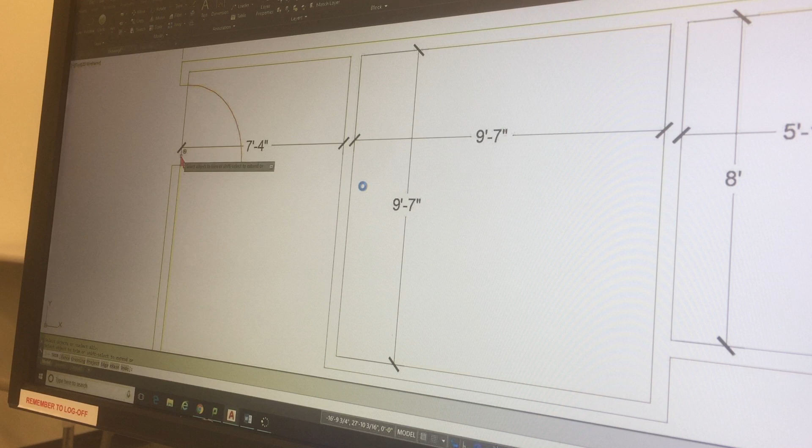Okay, so that's what we got, and then I would trim this out here again, using select all, just to make it look a little better. Now this one doesn't have to be trimmed, because that is a dimension, and so I wouldn't want to get rid of that. And this one looks like right here. Yeah, so sometimes you got to kind of choose things a little bit differently to get it to trim. And there we have that.

So then I can just go ahead and start to move my dimensions where they need to go. In this case, this is supposed to be outside anyway. So this is how you begin to build it.

Now, my next wall, and another cool thing too is if I want to use my software to change my layers, I can just go to here and say make current. I click on make current right there, and I click there, and it makes my walls the current layer. So it's that brown layer.

So now I'm going to keep on, and I'm going to go ahead and touch it here, and my other wall's got to be 4 feet, so I type in 4 feet, like that, boom. And then it's got to come out a distance of 4 feet 4.

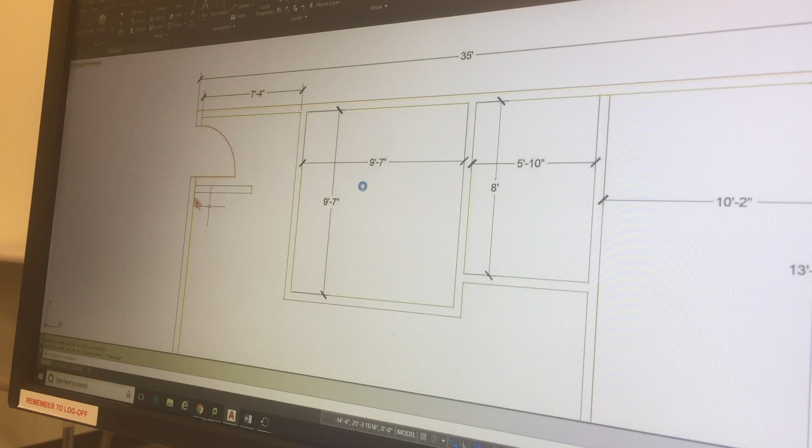And then the thickness of each wall is what? Yeah, and so I can just go ahead and bring it back here, return it, and we'll snap right to there. Go ahead and trim it again. And that's gonna, and so you kind of get the idea.

Now, once I want to put in my windows, there's a couple different things I can do. Okay, we'll start with this 4-foot window that we see at the lower left here. Now, first of all, we're going to change the layer to windows. Now, to draw this right here, there's a couple things I can do. I'm just going to show you a couple different ways to do this. There's more than this way to do it, but I'll show you this.

You'll see that my measurement tells me what the center point of that window is. What's the center point of the window? Okay, take a look at the upper left part of our drawing. Let me show you what I mean.

We're going back here to floor plan assignment. Make sure this is clear. Okay, here it is right here. And this is the right measurement. Yeah, it is. Okay. Yeah, by the way, if we were missing a dimension, we can find it right here.

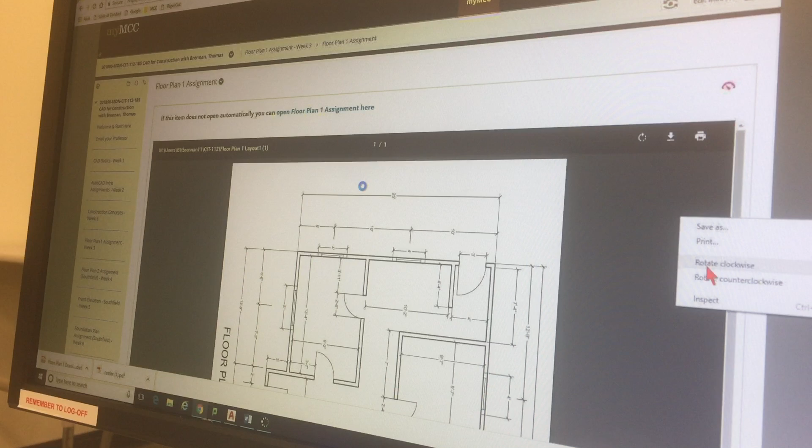Okay, so what we have right here is the distance from here to here is what? 10 foot. It's 10 feet. So that's telling me from the outside wall to the center of this window is 10 feet. And very often that's how windows are dimensioned. So it's a 10-foot dimension.

So I got my windows going here. I can start, just to make life a little easier on myself, I'm going to start with a polyline. I'm going to start from my outside, and without clicking, I drag it down. I type in 10. I kind of lost it. All right, and I go down here 10 feet.

Okay, and then when I've got that, that's my center, the center of my window, so that's where I start. Now, how wide is my window? 4 feet. So I can go up 2 feet, and then go in this direction, then down for the full length of the window, which is 4 feet, or 48 inches. Then I go back this way, and close that out.

Okay, so I went ahead and drew that, and you can see that's in place now. Now, just so you understand how I did this, I made the trim pieces on each side 6 inches for each window, so just go over 6, and then we can go down to there. Then we do the same thing, just touching it here and going 6 inches and drawing those little line pieces.

And then I want to make sure my midpoint object snap is turned on, and then I can create my final line, which goes right here, like that. And that is how you create your windows.

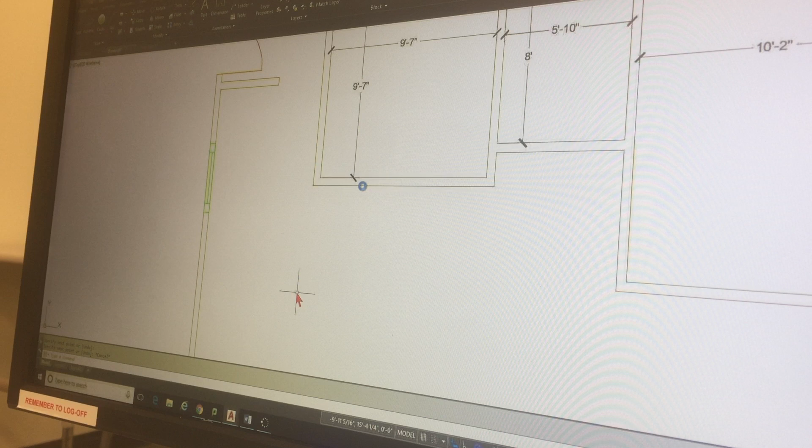Now we're going to get into inserting blocks and so forth, but for right now, that's just a quick and easy way to make a window.

Now, if I go back to my dimensions here, I'm on the dimension layer, and I want to go ahead and identify that and say, yep, it's at 10 feet. It picks up the midpoint right there, and it finds that, and we're good to go. So now my drawing is looking pretty kosher.

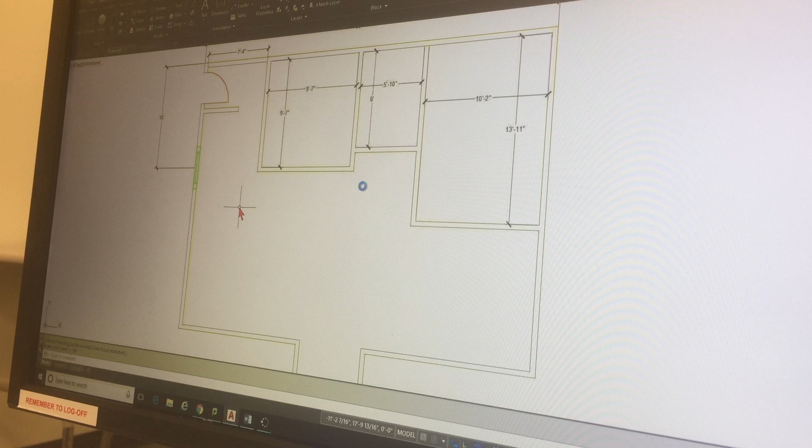Now, at this point, I could just go ahead and copy that window exactly 10 feet down. So now we're going to look at the copy command.

So the copy command, I can just go ahead and pick these elements, and since I'm using my blue selection tool, it only selects these things. If I were to go in this direction, it picks up way too much stuff. So I go this way. Does that make sense? Yeah.

All right, so I go there, and I right click. Now at this point, I'm going to click here, and drag it down. How far do I want to go? 10 feet, that's right. And then I got that, and we're going to verify that it is right. So go from midpoint here to midpoint here, and if I got it right, we are in business. So I just did a quick copy right there.

Once I got one, I can just copy it all around, okay. So that was copying, and that's how I got my two 4-foot windows.

Now, if everything's right, my last dimension down here should be 5 feet. Let me take a look at my drawing out here. This should be 5 feet, if I did it right. Let's find out. So we'll go ahead and click here, and click to the center of this, and shazam, we're good to go.

What did you click on though to make it move? How did it know it went from the center and not from the top? Okay, what I did here is run a dimension here, clicking it here, on the window. When you moved it, okay, good question.

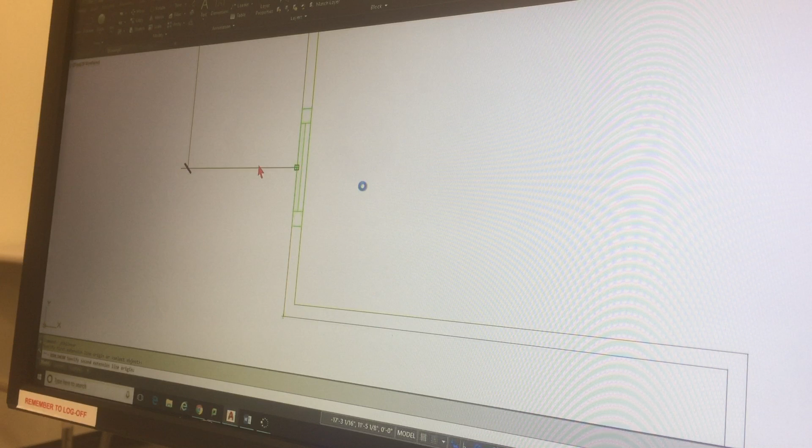Okay, so what I'm going to do here is if I just go ahead and erase this, just grabbing that. Copy goes like this. Copy is a great command, copy and move, you're going to be using this a lot. So go to copy. Now, first of all, we saw this is not a good idea.

So they decided to test the emotional intelligence of this particular gorilla. What they did is they started to treat this gorilla really, really well. They gave it new food, petted it, made sure it had toys, took it for walks, all this kind of stuff. And it would begin to express things like 'I love you.'

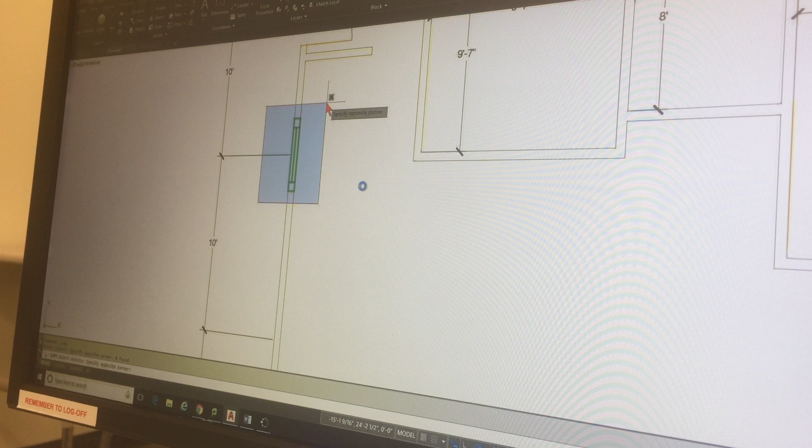Then they decided to see what he'd do if they treated him not so good. They started to deny him his food, left stuff out of his reach, and just started to mess with him to see what he'd do. And he cursed them in the most profound gorilla language, which was 'you dirty bad toilet.' So that's gorilla cursing right there. That's real gorilla cursing.

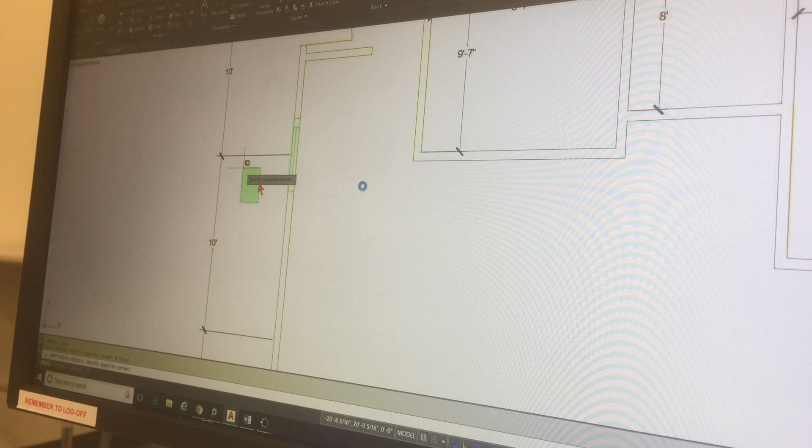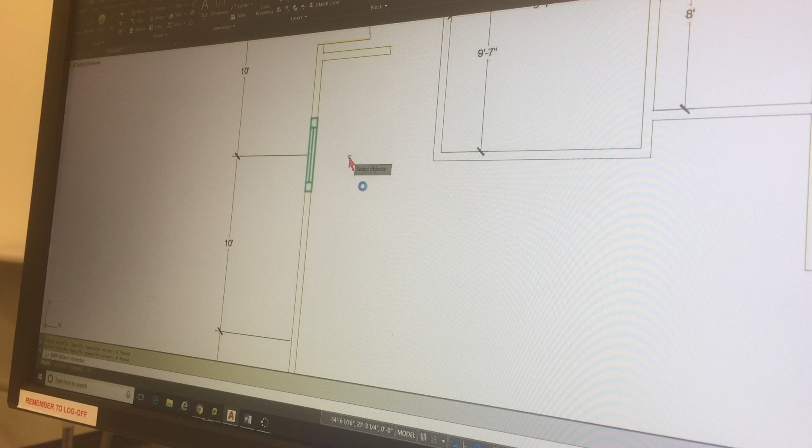Okay, grab that. Now, the next thing you do is when you're going to copy something, AutoCAD has the intelligence to know that wherever you pick and tell it to go, it's going to go an absolute distance. So for the window, whether I pick one end, the center, or the other end, it's 10 feet no matter how I go.

So if I right click here, it asks me to pick a base point, and it doesn't matter where I pick. If I pick here and go down, I can say 10 feet, and as long as I tell it where to go, it's going to be 10 feet, and it puts it exactly where I want.

Does that make sense? You're supplying a base point, and you don't even have to supply one — you could just hit enter — but it tends to be confusing to people, so I like to give a base point because it makes you feel more secure about what you're doing. Does that make sense, how copy works?

You're going to need to use this. Move and copy operate the exact same way. You start the command, select your objects, choose a base point, and tell it where to go. That's what's going on there.

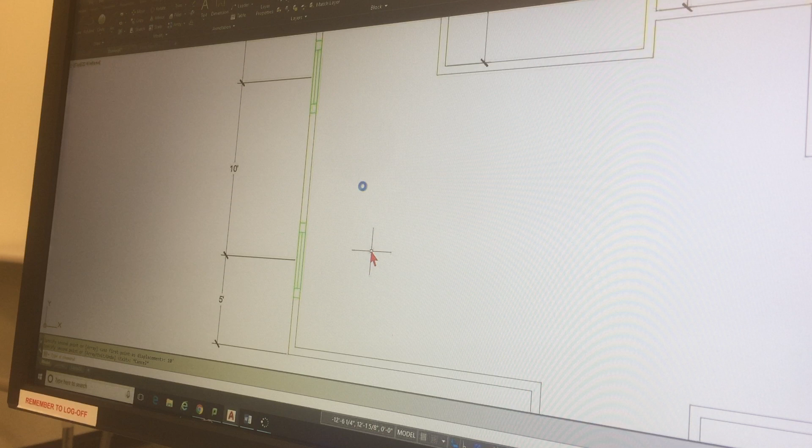Make sense? All right, hopefully so. I'm just trying to save you time — or you could just draw it all over again yourself. You can do that too.

Now this is where it gets interesting. I could also copy this to the other side of the drawing and then place it. I could do that too, but that might be a little bit too complicated.

There's also some 5-foot windows, but the same thing works however you do those. So that's how you do your windows.

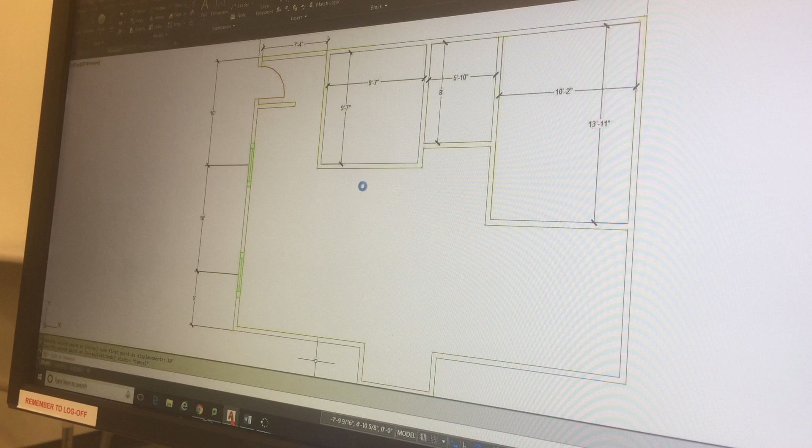Now your doors — we already know how to do doors, we saw how to do this one. Now the doors that we see here, well, it looks like I left off a door dimension, didn't I? I did, I left one off. I'll show you which one it is — I did not put in the dimension for this door right here.

So the dimension to this door, let's put it down quickly so you have it: 2'8". Write that down — get out a pencil or paper, write down 2'8" for that door. I could have made you figure it out, but that's a little too much. And there are a few more 2'8" doors. Okay, so you got that.

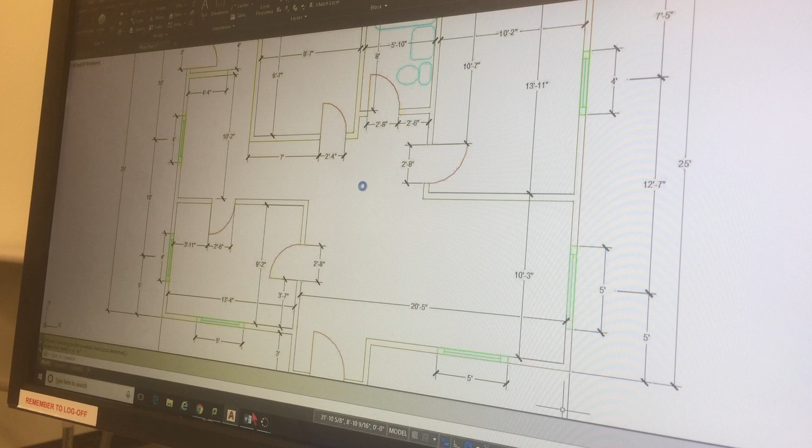Now going back to here, as we're starting to construct this right here, so we saw how...